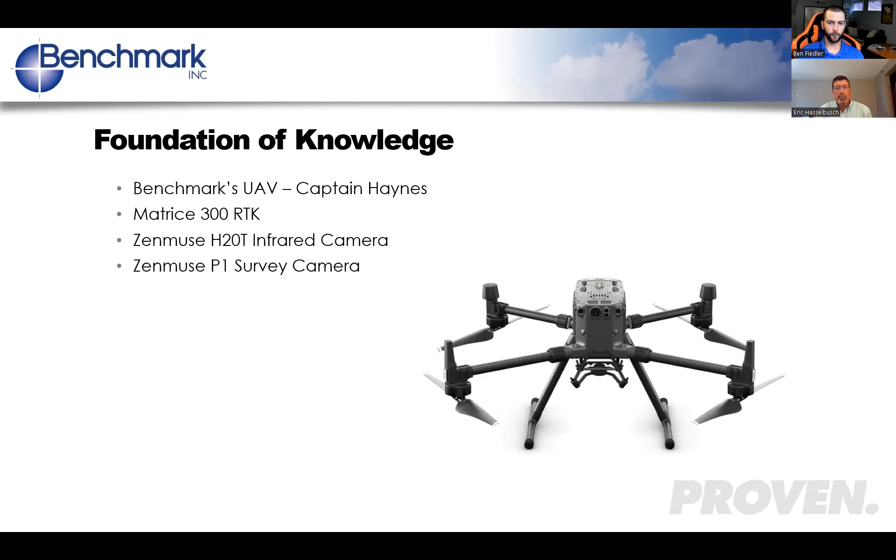So when we're doing a survey with the drone, we can really reach out there and take some really close-up photos while the drone stays far away. The other camera is the P1, which is a purpose-built survey camera. It is engineered to take the best photos for the purpose of creating digital models, maps, all of the things that we're using it for. It's purpose-built just for that application.

The next thing we're going to talk about are orthomosaics. An orthomosaic is a series of photos taken 90 degrees from the ground that are all stitched together to create one large image, similar to Google Earth. There is a technical difference between stitching and an orthomosaic, because during this process, it's actually recombining all the photos pixel by pixel so that there aren't sharp edges between the photos.

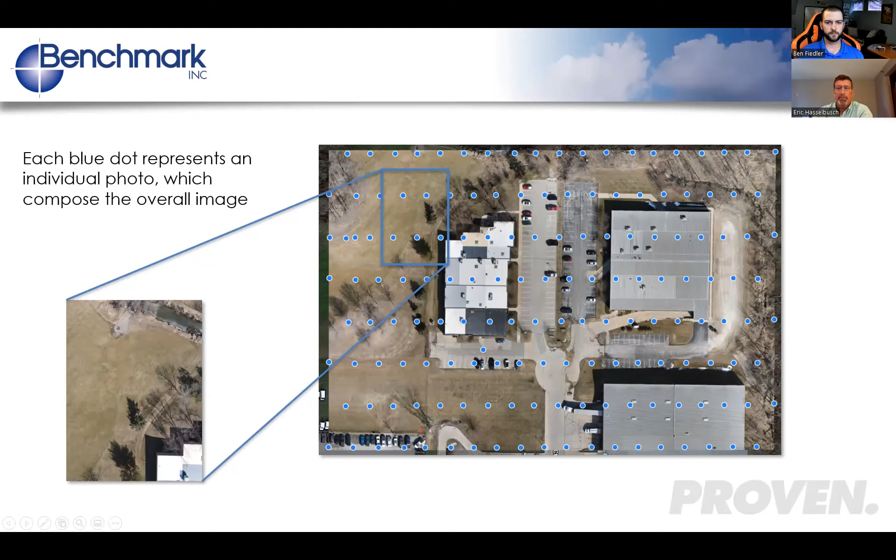So the next topic we're going to talk about are the types of orthomosaics that we are creating. The first one is an RGB, or red, green, blue, orthomosaic. These are orthomosaics comprised of visible light photos, your typical photos you'd see on any type of camera, images that are just in the visible light spectrum.

The other type of orthomosaic is the infrared or thermal orthomosaic, which is from an infrared camera using infrared light spectrums. That's what we use to identify wet insulation.

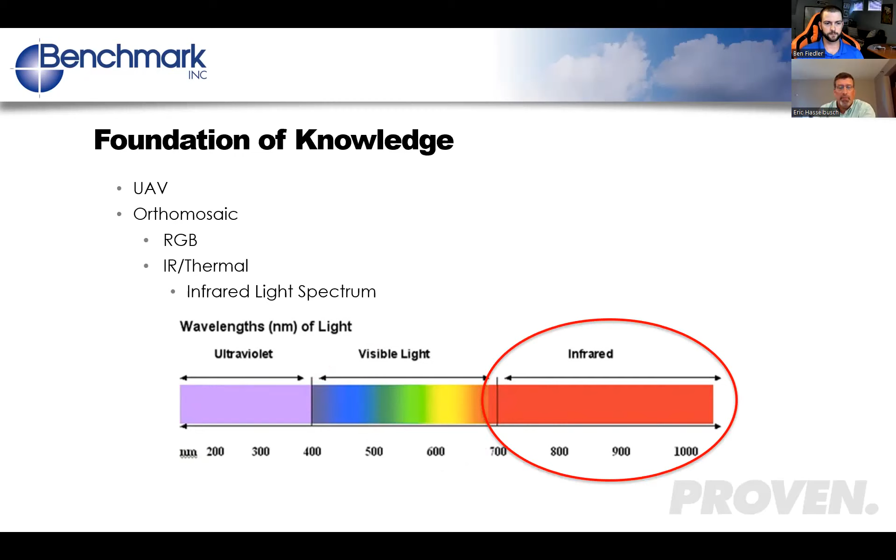Now we have some orthomosaic definitions out of the way. We're going to move into some of the legal side of the drone industry, the first one being the FAA, the Federal Aviation Administration. In the United States, this is the government body responsible for managing the laws and practices around any aviation. Every country is different - Canada is regulated by Transport Canada - and because of that, every country has different drone laws. For the purposes of this presentation, we are only focusing on the United States and the FAA.

For the FAA, all the laws are contained within 14 CFR Part 107, which is a long, kind of confusing term. Everybody just calls it Part 107. That's the law that regulates drones specifically. So anything within Part 107 are the laws corresponding to the drone.

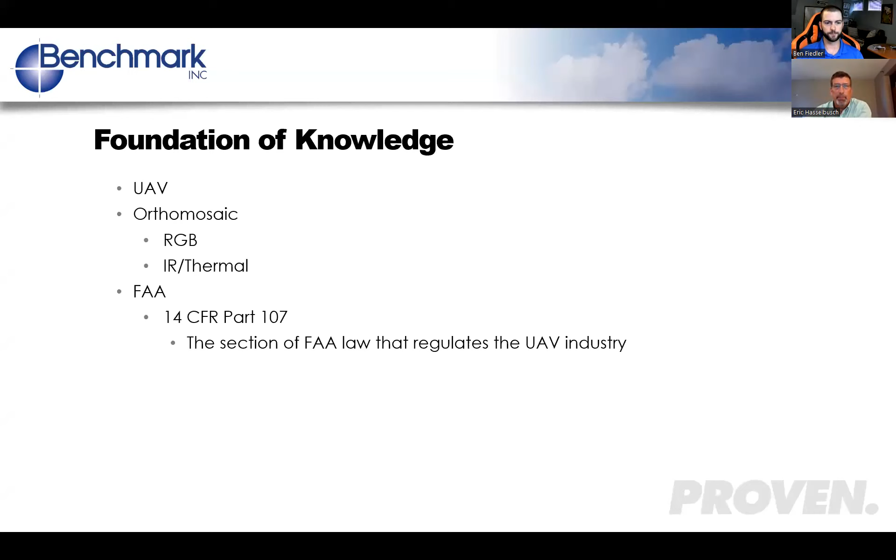Let's go ahead and take a look at our first poll question. We have many clients that have drones or UAVs, so we'd like to find out: does your company have licensed UAV pilots on staff? As that poll question pops up, it's pretty quick and simple to answer. Please answer yes, no, or planning on adding them in the future.

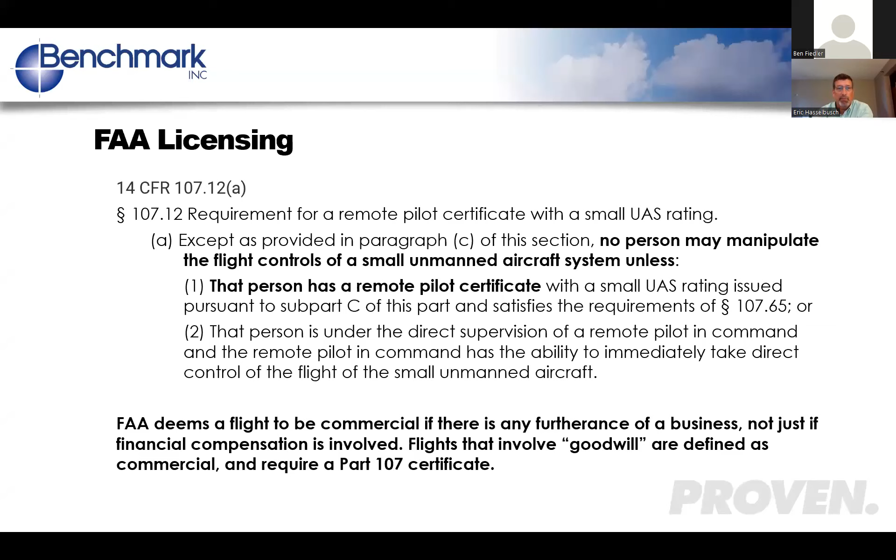Another key piece of that regulation is that it requires the pilot to have a physical copy of their certificate with them at all times. It looks a little bit like a driver's license, issued by the Department of Transportation. You are required to have a copy of that with you anytime you're operating the drone. So if somebody is going to be flying a drone at your site, a very easy way to identify if they're qualified is to ask: do they have a physical copy of their license or certificate with them at the time of the flight?

The next piece is insurance. First off, the FAA does not require insurance for UAV operators. Some states like Minnesota do have requirements to have insurance, but that's fairly rare. By and large there is very little requirement to have insurance.

It's a good idea to make sure your drone operators have liability insurance for damage caused by the UAV. So if there was an accident, if they were to crash into a power substation, anything like that, as well as photographic liability. Because it is a photography service, there's a special type of insurance that must be carried for the photographic side. Additionally, there's hull insurance for drones - if you crash the drone, your liability insurance covers the damage to the item it crashed into, while hull insurance covers the damage to the drone itself. Those are insured separately. So there are really three types of insurance a drone operator needs to have.

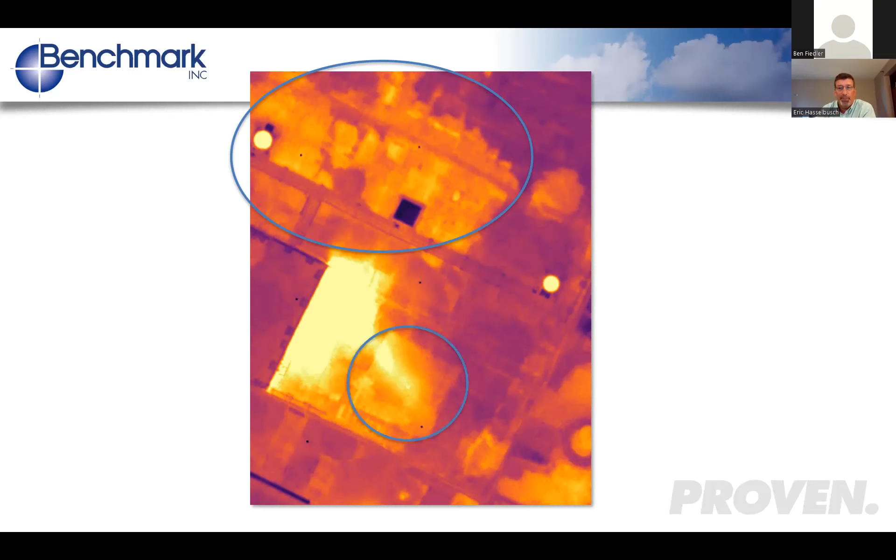If you look down below, there's another spot right here that also looks like a wet insulation signature. After we went on the roof and cut cores, we were able to identify this top area is wet insulation, and this bottom area is actually a roof repair that used a different type of insulation. Because there was a different type of insulation, the signature looks slightly different.

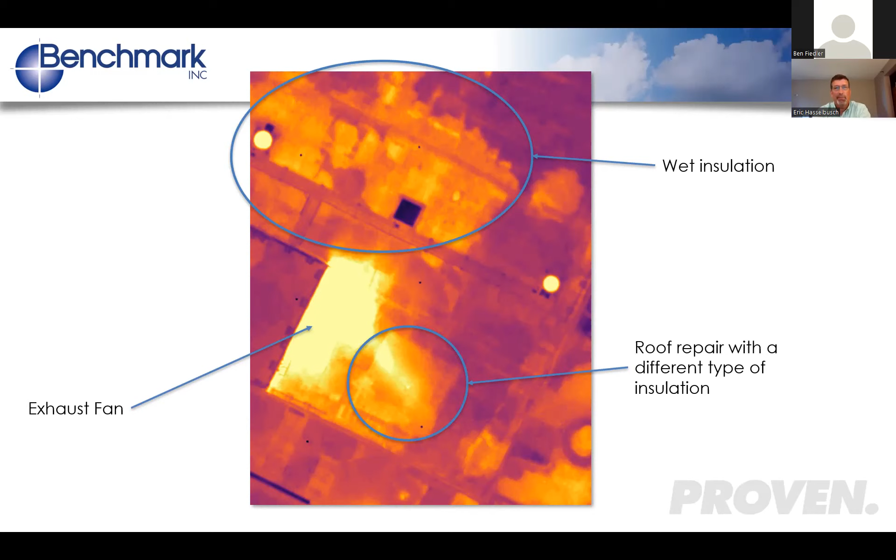And just for your reference, this big blob here is an exhaust fan on the side of that building, so it's exhausting hot air out on the roof.

So Ben, how many miles or how many flights have we flown? I think we're over 500 miles flown. I've lost track of the total number of flights, but it's several thousand individual flights going on.

I think Ben made a lot of technical points, a lot of FAA information, but it's really pretty simple. Does the pilot have remote pilot certificates? Do they have that? Are they insured? And most importantly, do they have the skills to help you reduce risk and increase the long-term performance of your assets? It's combining the technology of the UAV and the data collected with the experience of that pilot to help you manage those risks.

So let's take a look at how we can use UAVs in a roof management program. The first thing we'll talk about is the infrared and thermal moisture survey. Ben shared one image of that, but what we've learned with UAVs is we can cover large facilities, in many cases million plus square foot facilities, relatively quickly.

Number two, we can really quantify that wet insulation. When we have an accurate orthomosaic or imagery, we can quantify the amount of wet insulation on that roof. And risk is a huge issue today. The risk of having people walking across your roof at night in the dark is greatly reduced when we can fly with a UAV versus handheld. Both options exist, but it does reduce risk when we fly with the UAV.

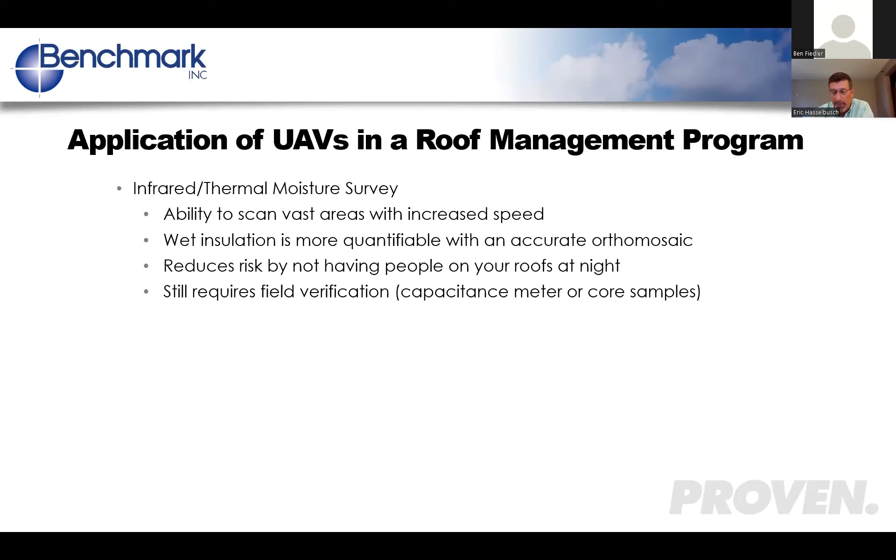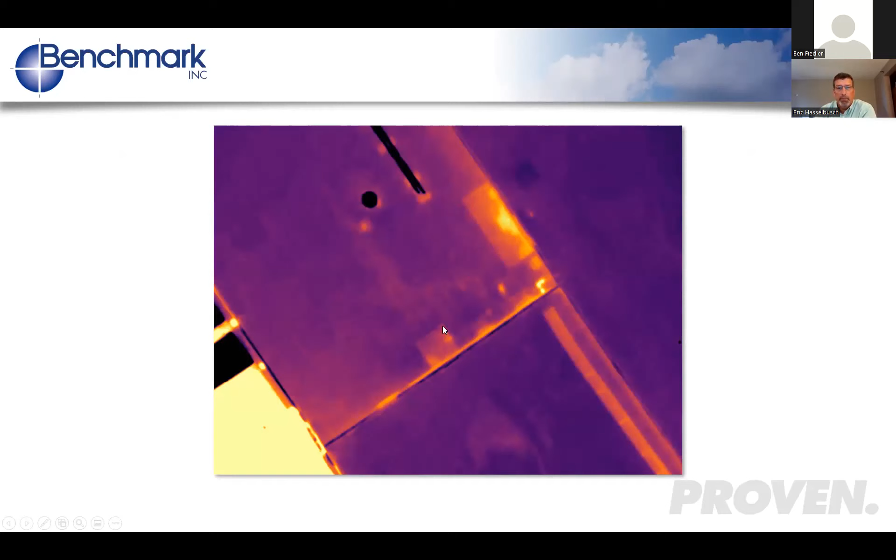So within the drone software, you can then go in and draw over those areas a shape that will tell you exactly the size of the wet insulation. So in this case, that larger area is 170.29 square feet of wet insulation.

And so we've eliminated the need for a consultant to be on the roof measuring, locating where this insulation is. But furthermore, if you do end up having a contractor come in to remove that wet insulation, we can also give them dimensions to zero in on where they need to start removing insulation. We can tell them that it's 14 feet 6 inches off the south wall, and it's a total of 10 feet wide, and they can very easily go to the roof and find that exact location.

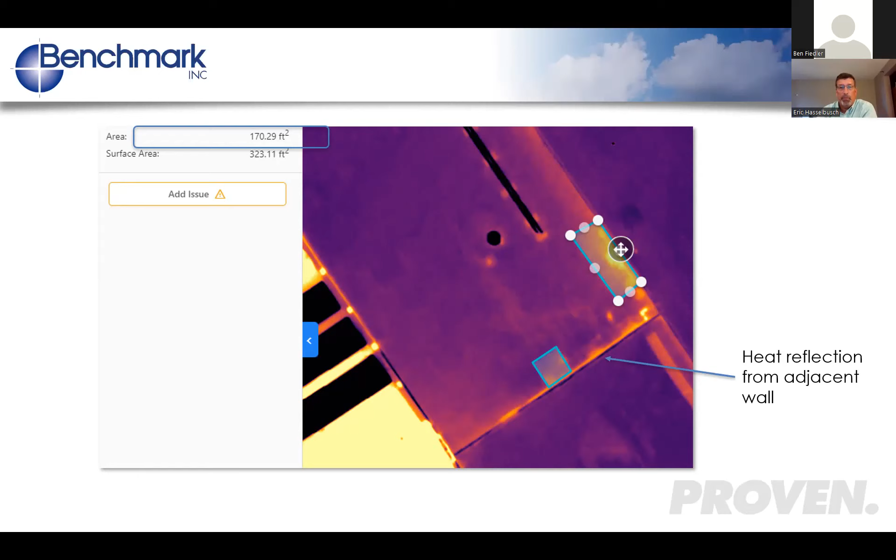Thanks, Ben. We took a look at some infrared images, and you'll see some more in some case studies, but let's take a look and talk about RGB orthomosaic images and how we can use those. It's really the ability to create highly accurate maps for dimensioning, and what you can see is really quite amazing, and then how to use that information as well.

So this first sample that I have, I'm showing you a comparison of 3 different images of the same roof drain. On the left here, we have the 45 megapixel image, taken with the P1 mapping camera on our drone. The image in the middle is a 12 megapixel image, taken with a smaller, cheaper drone. And the image on the right is from Google Earth. As you can see here, there's quite an extreme difference in quality.

One of the things I like to point out on this image is right here, you can actually see our office is right on a golf course. During the day, we end up with quite a few golf balls on the roof of our building, and in this case, one found its way to the drain. You can actually see the golf ball in the drain. On this image, you can see that there might be something there, but if you didn't have this image to compare to, you probably wouldn't have known that was a golf ball. And obviously with Google Earth, there's no chance you will ever see something as small as a golf ball.

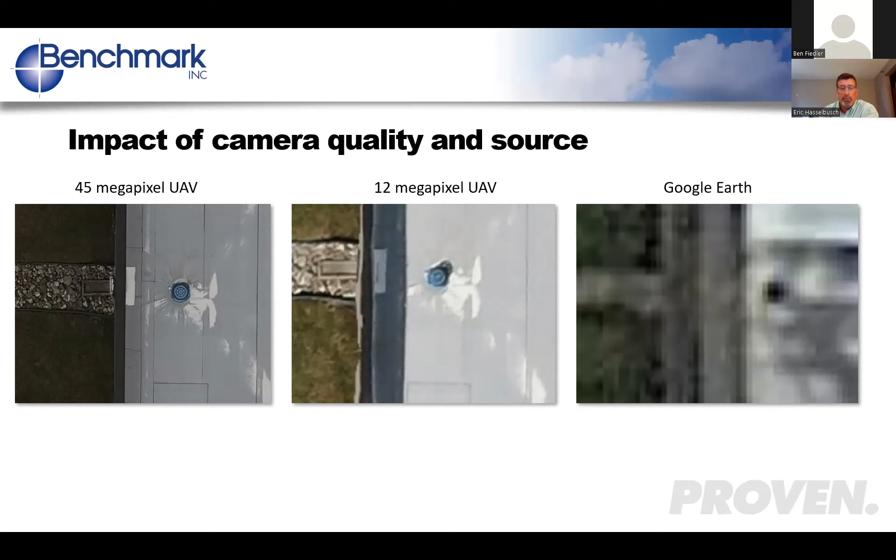But the 45 megapixel image, we could still zoom in further. So I went ahead and zoomed all the way into the drain. Now you can see that drain getting a little pixelated. It's getting hard to see, but you're still able to see quite a bit of detail, like the openings in the drain strainer. The 12 megapixel image, you might know it's a drain strainer, but you can't see any of the fine detail. Google Earth, you really can't see anything at all.

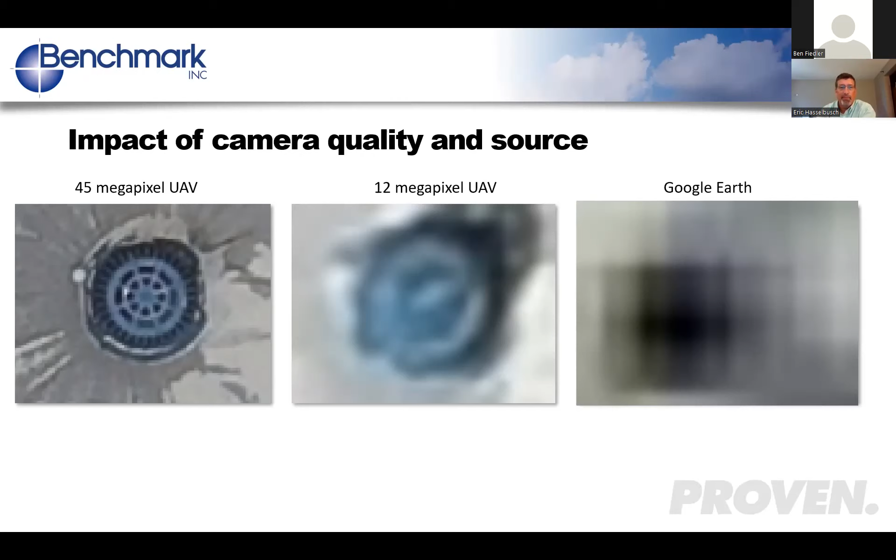We did just get a question asking how high were these images taken. The drone images were 175 feet above ground level. Google Earth is obviously satellite based. But this really goes to show the difference that the higher quality drones can make.

The next example I'm going to show you is how we can use these for measuring. As you look, there's this blue line that I have drawn across the roof, and you can see on the left that that's 107.39 feet long.

The next slide, I'll show you how I have quantified that in the past. But that is a measurement. We can get up there on the roof, we can pull a tape measure, you can verify that it's accurate. The software does tell you your known accuracy, so you have pretty good confidence of the results of the measurements.

But the thing that I find very interesting about this measurement is it also captures three-dimensional information. Right here in the corner of this roof, we have tapered insulation for drainage purposes, and you can actually see a little bit of the water runoff from this unit. You can see where the water runs, which really shows you the corner of where that tapered insulation exists. If we look over here at the slope profile of the roof, this point here would correspond to this side. You can see the slope running downhill, then you can start to see the slope going back uphill. So you're able to see something as small as 1/8 inch tapered insulation.

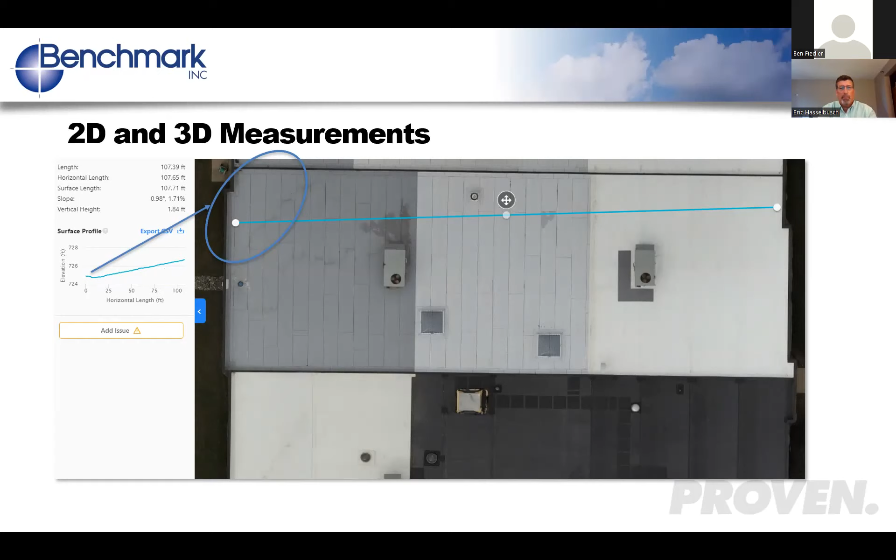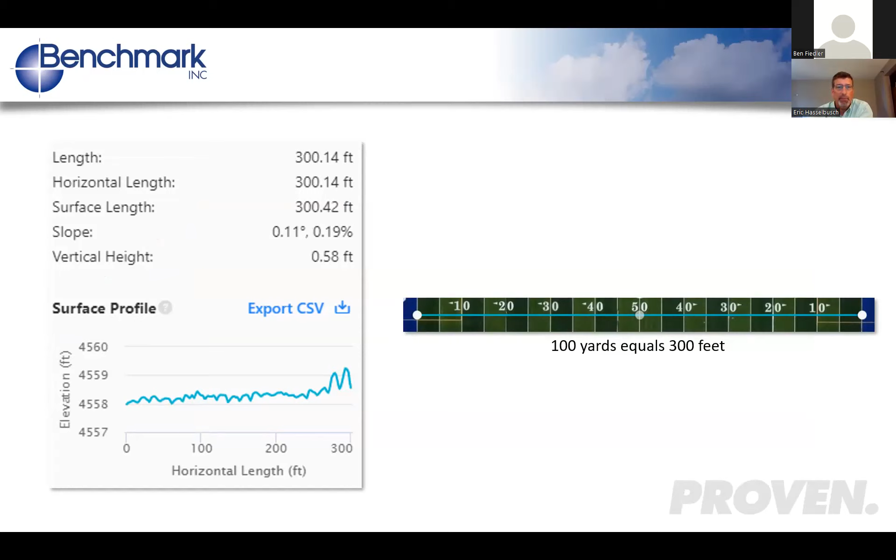Earlier, I mentioned a way to verify the measurements. During a recent project, I was flying at a high school that had a football field, so I went ahead and flew it and drew my line because I knew that was a known dimension. My measurement came in at 300.14 feet, so that's a very easy way to verify your measurements in addition to other verification methods.

So we talked about infrared, we talked about RGB, and now just imagine for a second you're sitting in your office and you've got a project you're working on, with engineers across the country, as many clients we work with do. You now have the ability, through using imagery and platforms, to talk through projects, whether it's a pre-construction meeting, a pre-planning meeting, or meetings thinking about remodeling a facility and making changes to the roofs from inside processes. You get a lot of really good information that you can use. And now Ben's going to share some 3D modeling, what we can do with it, and how you can apply that as well.

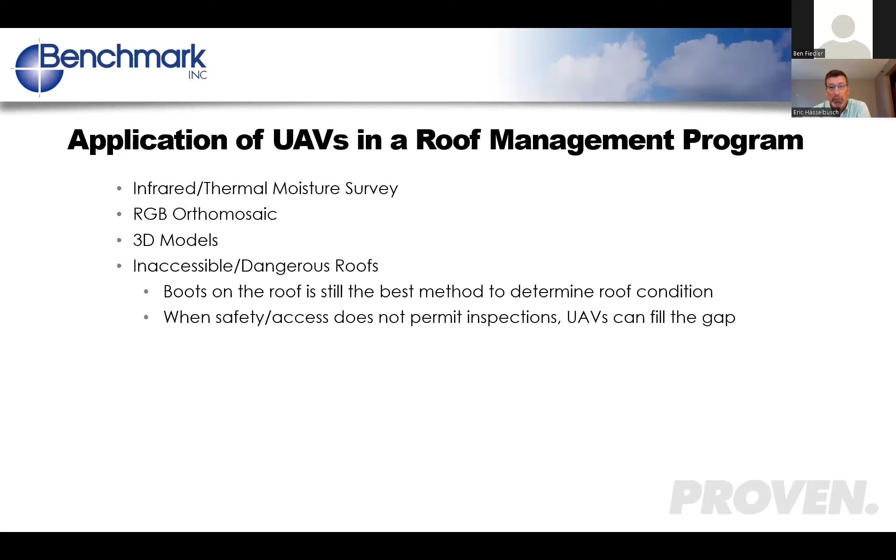We'll take a look at a couple examples here. These images were taken on a survey for a facility with all metal roofs on it. This is an image that was taken from the drone. Having that long telephoto lens on the drone allows us to keep the drone back a good safe distance, but still be able to zoom in to the point where you can very easily see the corrosion on those fastener heads, and the sealant on the joints of the metal. So you're able to see quite a few things from that drone.

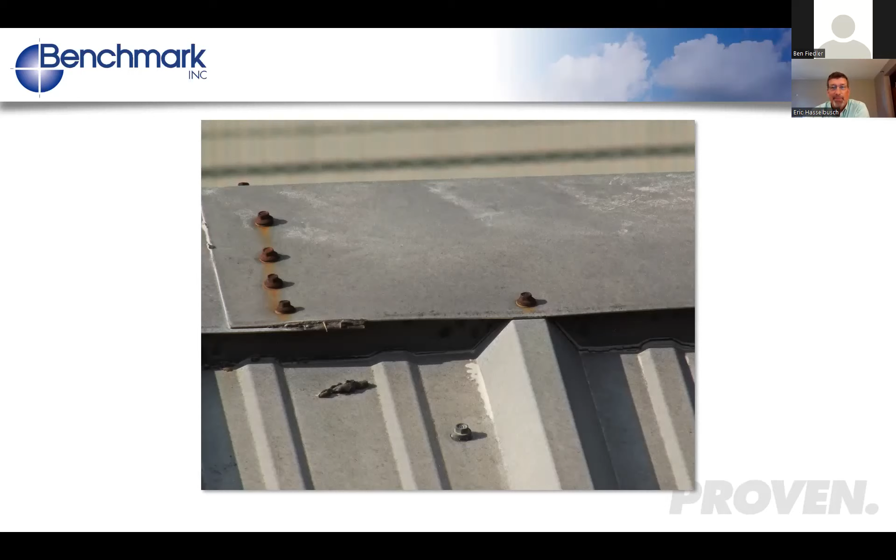However, there's also things you can't see. There should be a foam closure on the cap, but you can't feel behind the metal to see if that foam closure is there. On the metal endlaps, you can oftentimes get corrosion on the underside of the panel, and one of the things a consultant on the roof would do is walk that endlap and listen to see if it sounds crunchy, or possibly even disassemble that endlap altogether. The drone can't do that. My goal, my hope, is by the time I retire that there's a technology that can do that, but that's the long-term view. That's not where we are right now. In the meantime, we can reduce risk by getting at least some level of information remotely.

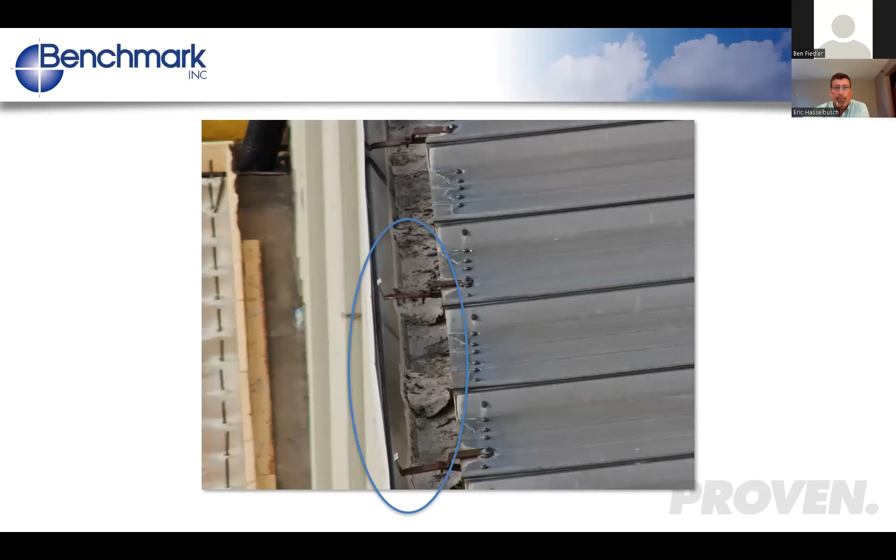This is another example, the gutter on the site. You can see there the gutter brackets were actually pulling loose. This is one of those photos that it's hard to take anytime. So even if you are doing a boots-on-the-roof survey getting information around that perimeter edge, if you have a site requirement that makes it impossible for us to access the edges, a drone can fill in the gaps.

This is another gutter issue where you're able to see that the gutter joints are breaking free. That might even be difficult to see from the roof, depending on your line of sight to it. You may not see that if you're standing directly on it, but by having the drone overhead, you can get a better view on it.

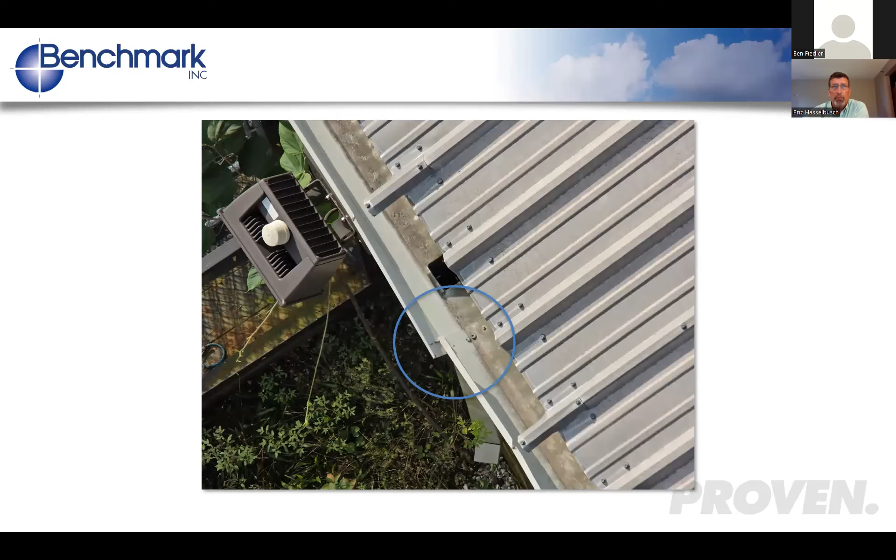So one thing I wanted to point out is that during a drone-only survey, our traditional model, the way we go about these surveys is we actually send out 2 consultants. The first one being the drone pilot, whose only job is to keep the drone flying safely and get it where the other consultant can use it. The other consultant's job is then to sit there and watch the video feed on a large monitor so that they can focus just on looking for defects. That way the 2 can work as a team, with a division of labor so that everybody is really just dedicated to the one thing they need to do best at that time. This is an image that was taken during a survey where the other consultant took a photo of me flying the drone around, but it gives you an idea of what that process can look like.

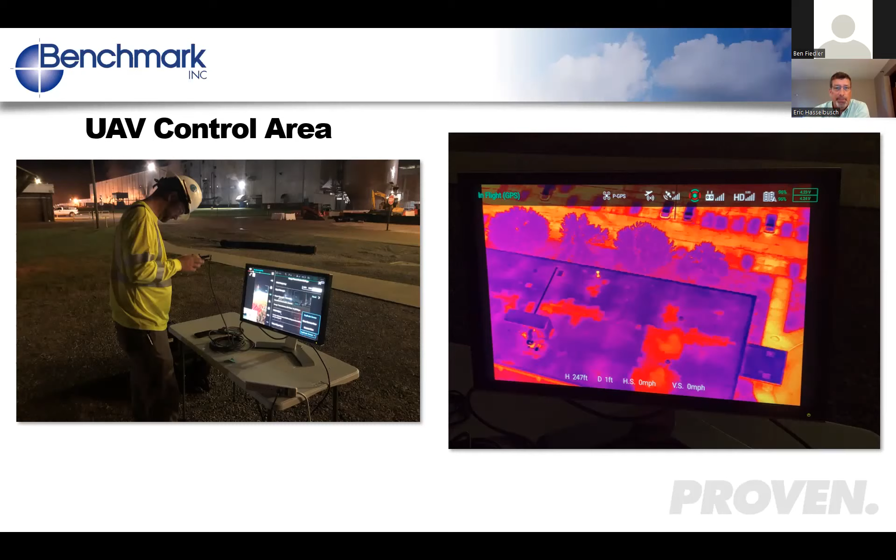I think that's a really important process because we talk about having boots on the roof, and the example Ben just shared was in a situation where we can't get on the roof, either inaccessible or not safe to get on. It's having someone that can focus their attention on analyzing what they're seeing, so when we leave the site, we've captured the information or data that we need at that time.

So we've spent some time talking about UAVs and how it can apply in roofing. Let's talk a little bit about paving now, and we're going to touch on land surveying. As you've seen with the point cloud 3D model Ben showed and some of the other images, we're capturing millions of data points. Let's see what that looks like and how it can be applied to pavement.

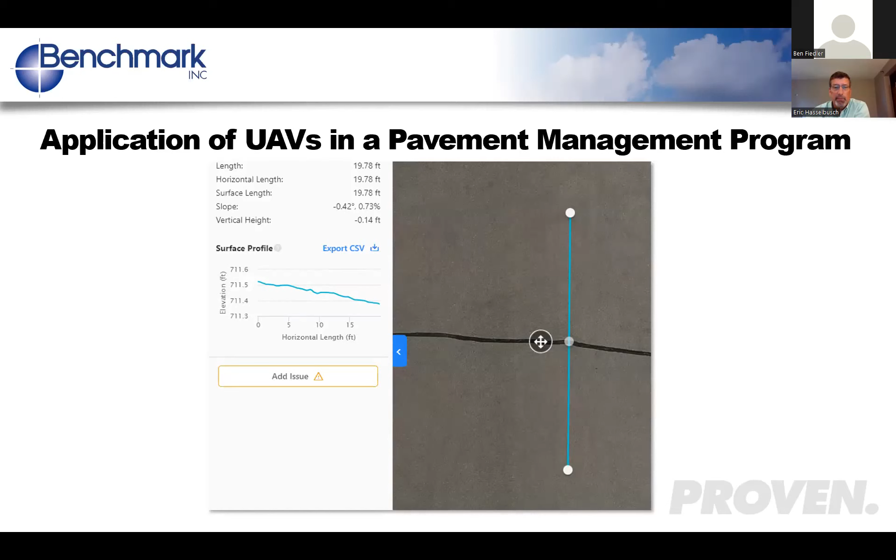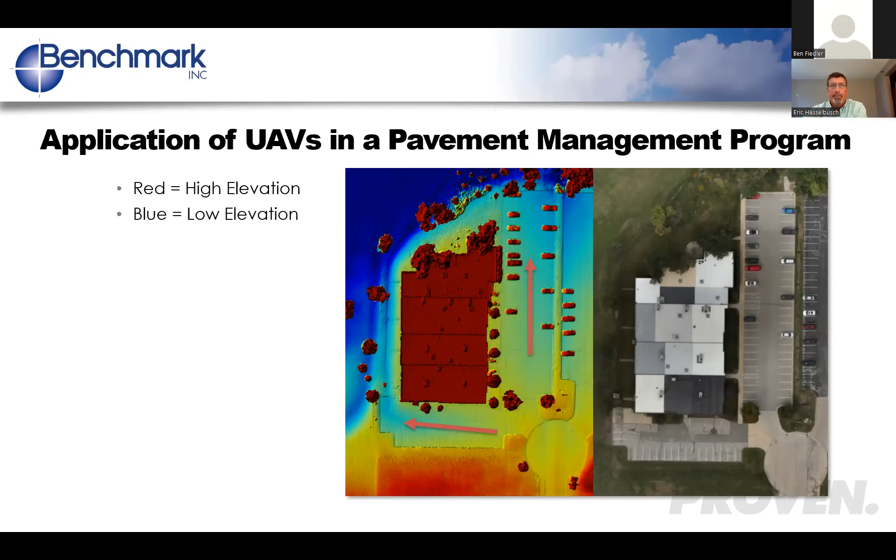So one thing I do want to touch on is getting into the weeds a little bit on how this data is generated. How does the computer model know what these elevations look like? And that's from a point cloud.

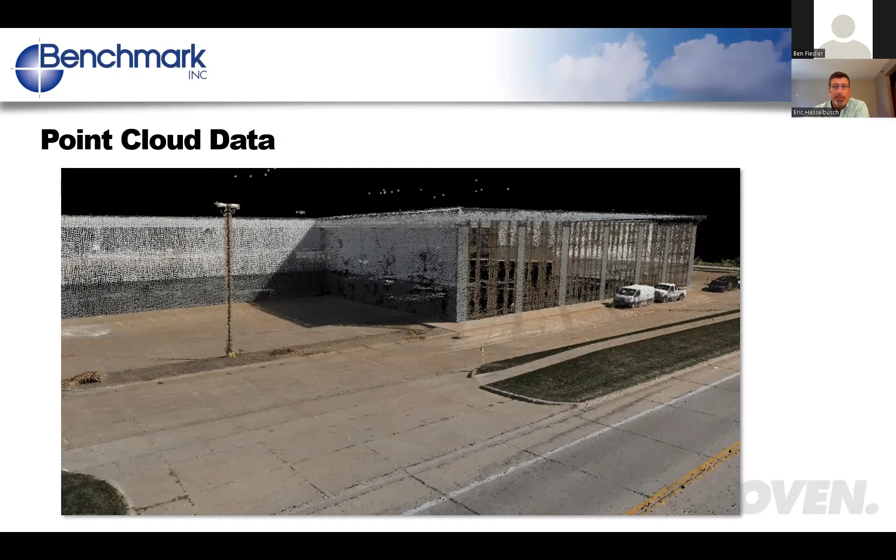So if you blow that image up, you can actually start to see each of those points that are put together to make that model. The computer system can look at that and see how each of the points compares to each other to determine that slope.

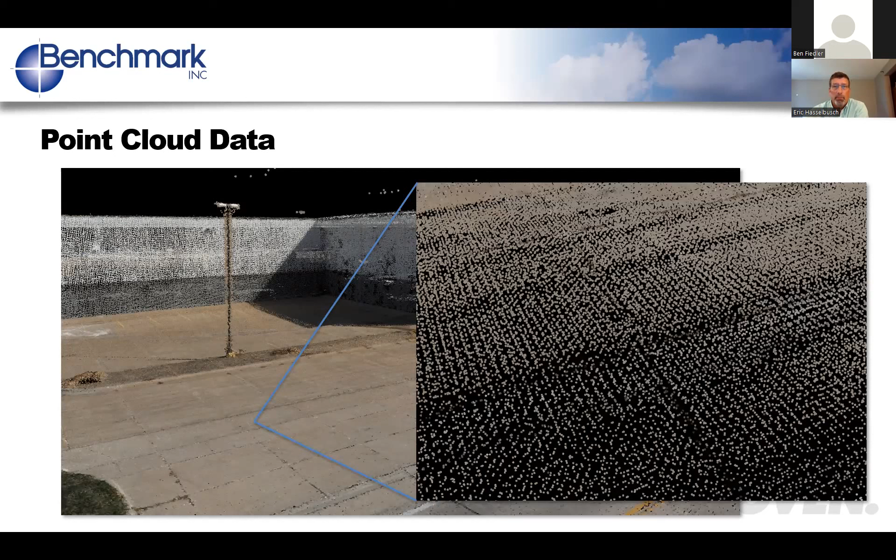So as we talked about land surveying, and Ben just shared the vast number of data points used to build models, we can also use the UAV for lighting surveys. And we're not doing quantitative, but in this case we've done some qualitative analysis, which we'll show when we get to a case study.

So the next section up will be case studies, but before we get there, I had a little bit of a soapbox I wanted to get on and talk about the difference between data and information. I recently read a book called The Goal by Eli Goldratt, and if you're in a process manufacturing type environment, you're more than likely familiar with that book. In the book, Eli writes that he previously thought of information as a section of the data used to make a decision, and later he realizes information is the answer to the question asked.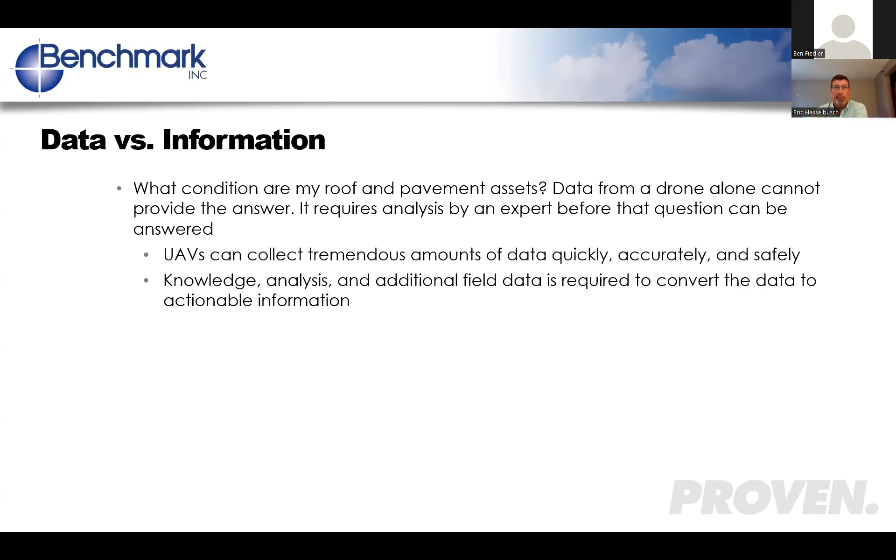So if the question is, what condition are my roof and pavement assets, the data that the drone provides isn't going to answer that question. You're going to have analysis by somebody, preferably an expert, that can answer that question using that data. The drones capture a tremendous amount of data quickly, safely. It's amazing, every day it blows me away what we can do with the drone. However, until you apply knowledge, analysis, and additional field data from that expert, they cannot convert that information, that data, into actionable information. And so with that, we'll get started into our case studies.

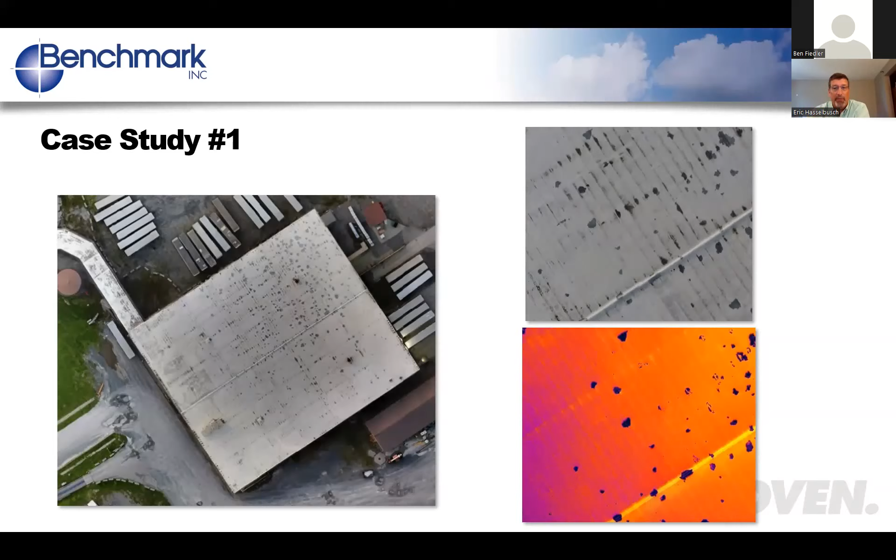Let's take a look at our first case study. It's really important you pay attention here because I want you to look at the top right and then the lower right. The top right, we have an RGB image of this roof, fairly detailed. Below that, we have an infrared image. And the question we're going to ask you to answer is, what type of roof system is this? Based on what you saw in that image from the drone, what type of roof system is that?

So let's go ahead and share this question. Our options are a coated metal roof, white single ply, spray polyurethane, and a coated modified bitumen. So give that some thought as you saw those photos. What type of roof system do you think this is?

Okay Ben, let's go ahead, we're still getting quite a few responses. I'm gonna give it another couple seconds. Perfect, they're still flying in. A lot of analysis taking place on this. That's good.

All right, we'll go ahead and end that, and I will share the results. So we have a coated metal roof at 40%, white single ply 27%, spray polyurethane 7%, and coated modified bitumen 27%.

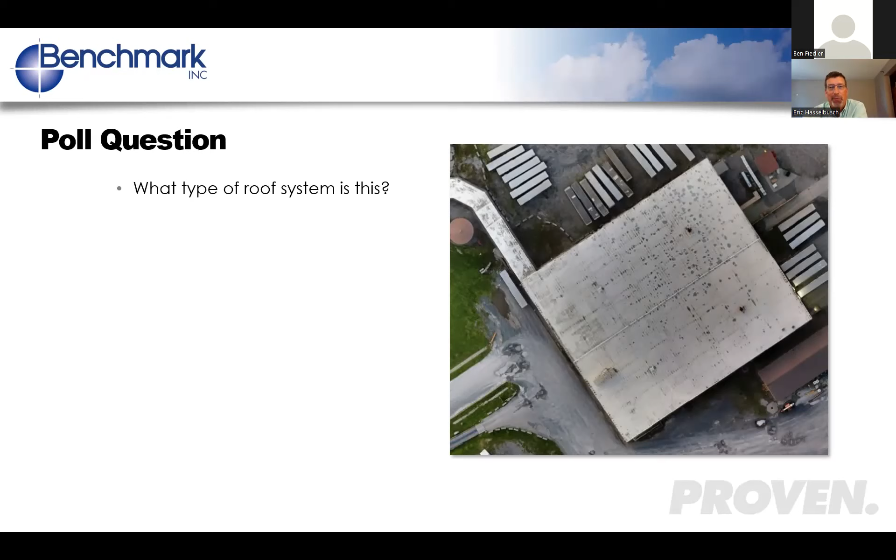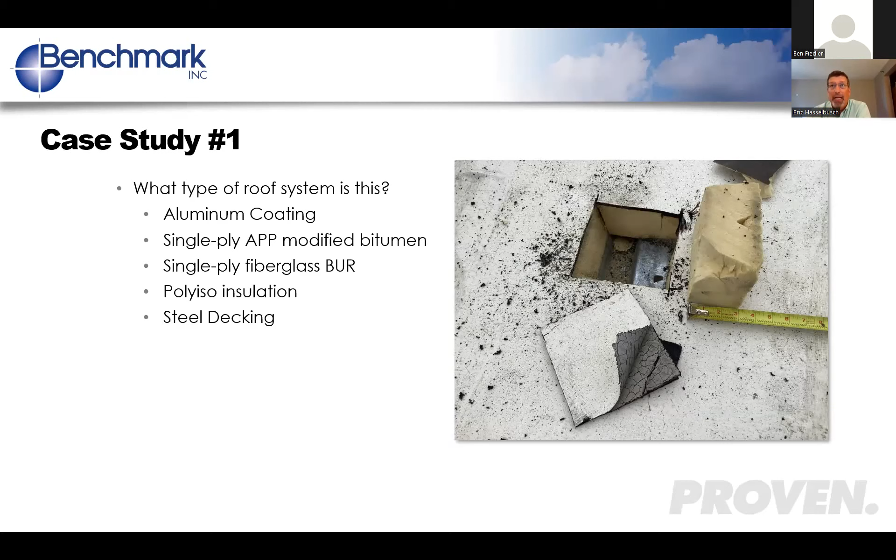Let's take a look at what the answer is, and we'll talk about this a little bit. The correct answer is it is a single ply modified bitumen roof system with an aluminum coating. So what's taking place here? 40% of people thought it was a metal roof. And I can tell you, when we had this discussion internally, when you look at these images, at first glance, you're like, yeah, it looks like it could be a metal roof. Until we dug deeper and got on that roof, took a core sample, and understood what it was.

So why was that? Well, the membrane ran parallel to the slope, and there was a control joint installed at the ridge. So that's why it was easy to appear that it might be a metal roof. And that is why it is so critical that we have boots on the ground, because in this case, more than 40%, probably close to 70%, of our audience would have identified this roof incorrectly. So it's easy to happen, and this is just one example of why it's so important you pair the data collected from a drone with the expertise and analysis of an expert and have boots on the ground.

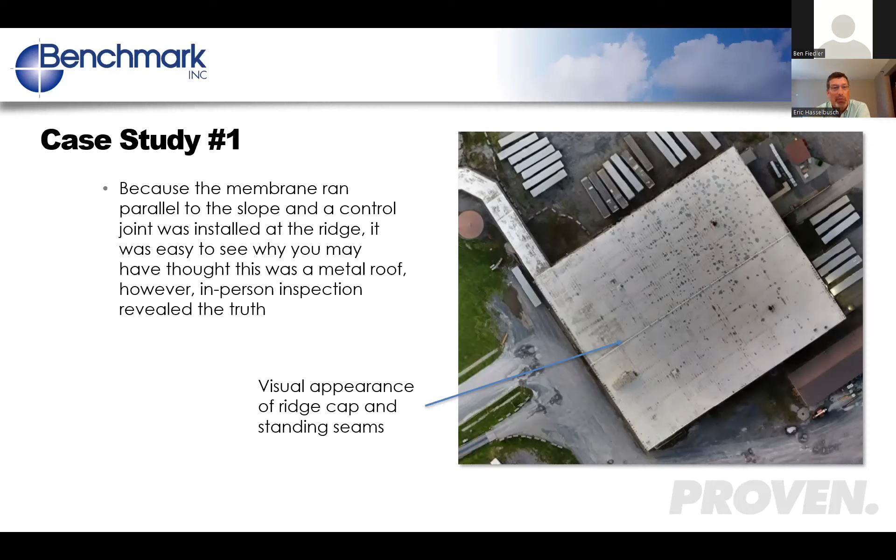So that's case number one. Let's go ahead and look at some more case studies, Ben.

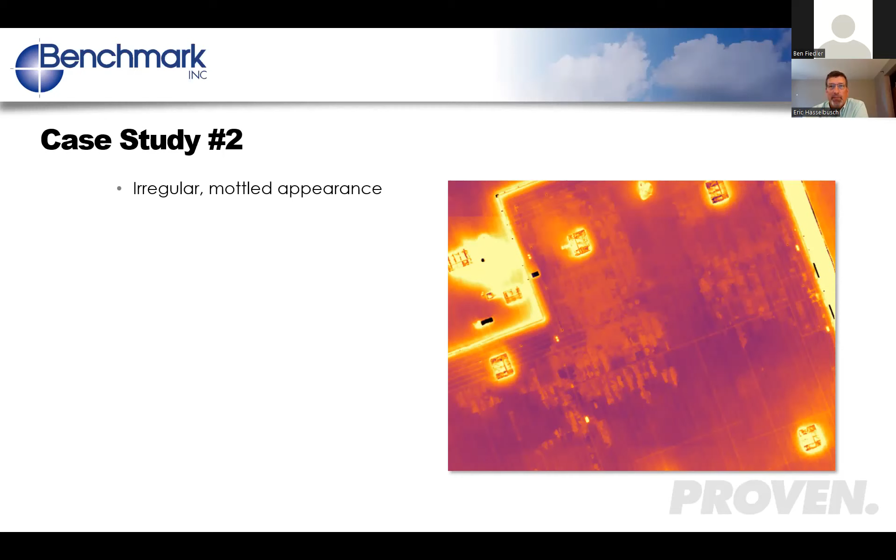So this was another infrared that I did, that I got done with it, had it processed. I'm looking at it, and I just didn't know what I was looking at. It tried to look like wet insulation, but the signature was just different. It didn't have a nice board pattern to it. I knew something wasn't adding up. So the question I had was, is this interply wet insulation, both, or neither?

So with that, I will launch this poll question. Our options are, what is this infrared signature showing? Interply moisture, wet insulation, both, or neither?

Getting quite a few results in, give it a few more seconds. And while you're answering this, if you have other questions that come to mind, feel free to shoot those in.

All right, looks like most results are in, and I will share the results. 24% identified as interply moisture, 5% wet insulation, 27% both, and 43% neither.

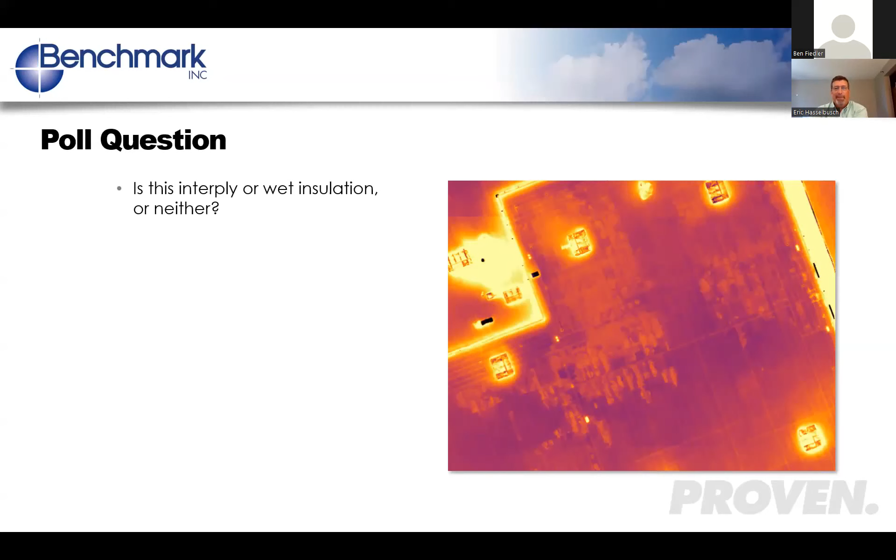So Ben, why don't you share what you learned on this roof? So after I did the flight, the next day I got up there and I ended up cutting some cores. And it turns out this roof system was somewhat unique in that the existing roof was TPO, that a few years earlier they had then covered again with another layer of TPO, with membrane directly to membrane. So normally you would see a layer of insulation there, but in this case, you effectively had a 2-ply TPO roof system.

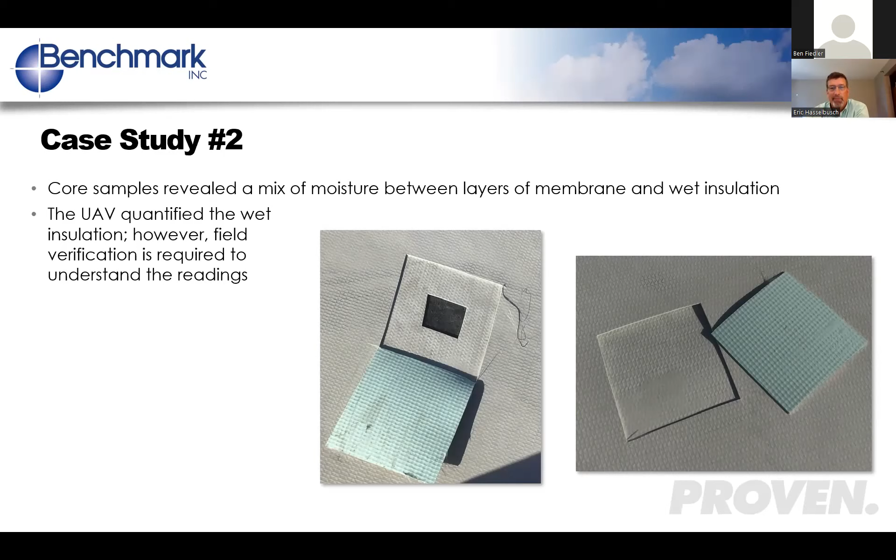And so as the top layer would leak, water would get between the membrane plies and spread out across the roof. It would then find another leak in the old roof system and leak down, and the insulation below would also become saturated.

In this case, it truly was both. It was interply moisture, and that's really prevalent. You can actually see the moisture sitting between the mechanical fastened seams. And over in these areas, you can see where it starts to become more muddy. That's because you see both interply and wet insulation. Both signatures are showing through.

So it's one of those where the core samples really were able to answer the question, what condition is my roof? And Ben, what else did we learn? Had we not done core samples, what else could have potentially happened as a result of this, or what else did we learn from the core samples?

Well, the big thing that comes with wet insulation, typically like in this situation, a large portion of the roof was wet. So the next discussion is, do you replace the wet insulation or do you replace the entire roof? However, once we cut the cores and found there were already 2 layers of TPO membrane, by code, it meant we had to replace the roof. So we could either replace wet insulation or replace the roof. The infrared, or the core sample, eliminated the option of doing a recover in this situation.

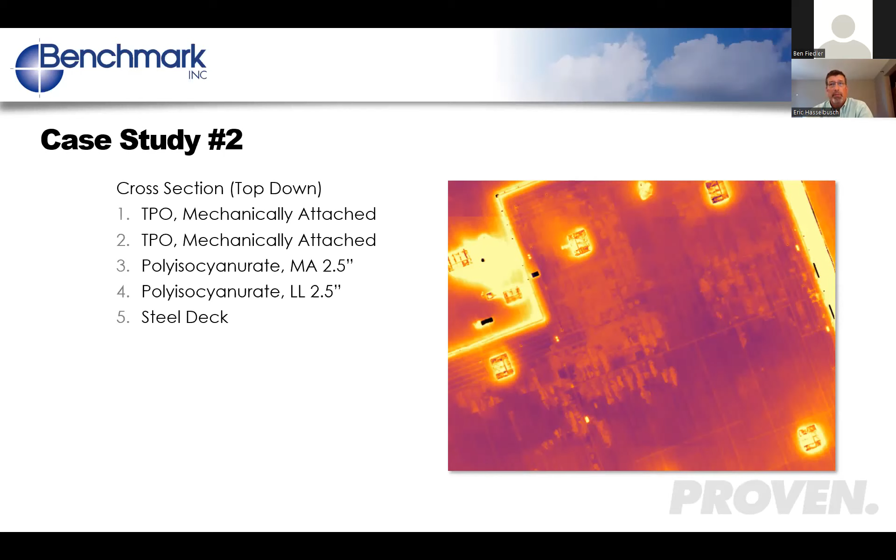In this case, they realized where they were adding parking stalls was actually already well lit, so they were able to not add additional lights to maintain safety. This is a great way to get a really good high level view of lighting. Obviously, in a lighting situation, you do need actual measurements, but the hard part with those is they're very spot specific, as you're walking around holding a handheld meter, taking individual readings. The drone helps you start to see where you need to look for problem areas.

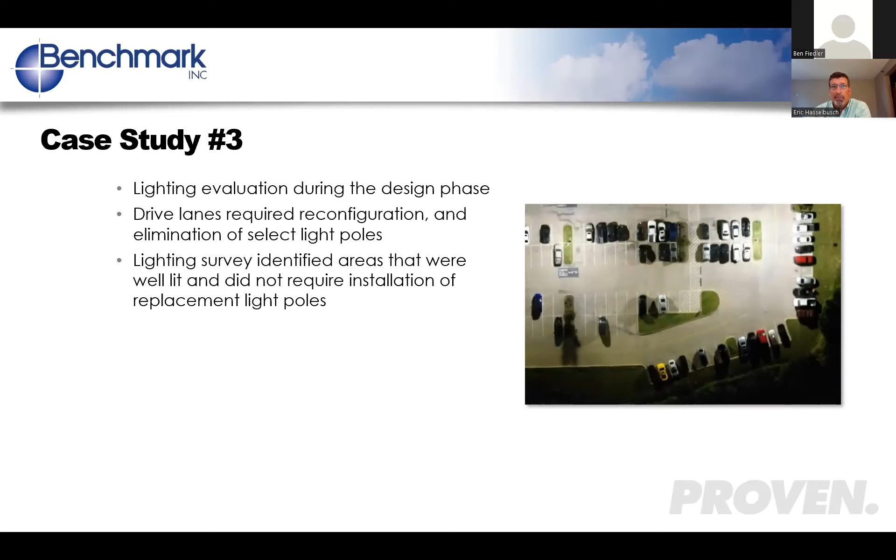The fourth case study we have is another infrared. Those I find have some of the most interesting aspects to them. The first time I flew it, the daytime high temperature was 89. At the time of the scan, it was 75 degrees, meaning we had a temperature differential of 14 degrees, which is really quite good. The wind speed that day was about 6 miles an hour.

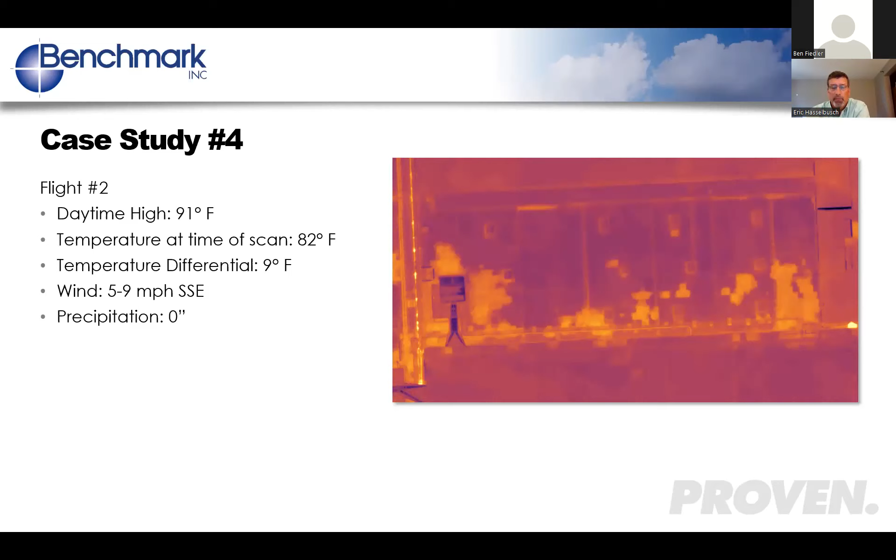So with Benchmark being really dedicated to being technically excellent, I went back and flew it the next night, and this is the result of that second flight. On this flight, the high temperature was 91, the time of scan temperature was 82, so we have a much smaller temperature differential. The wind speed was slightly higher, and there was no precipitation that day.

However, when you compare the images, you can really tell that second flight gave a much easier to read image. They're both accurate, you can see the same wet insulation on both, but that second one is just easier to do analysis on. And so Ben, go ahead, finish, Ben.

So the moral of the story is you can do infrareds with some rain, you can do infrareds with higher wind, you can do infrareds with small temperature differentials. You can't just look at any one of those conditions individually. You really have to look at the whole condition of the flight as a whole, as well as look at the images after the fact.

I think this is also an example, whether it's RGB or infrared images, or even doing consulting work, where things just don't always add up. It's an opportunity to really dig into things and understand why we're seeing what we see, because it's not always black and white as to what's happening on a roof or pavement. It takes time and thought to dig into those things. As we continue building on using UAVs and tying that into consulting, there's a lot more we're going to learn. So it's really important that whoever you're working with has a mindset of wanting to improve the process, because you can't just take the data from a drone and assume it's accurate.

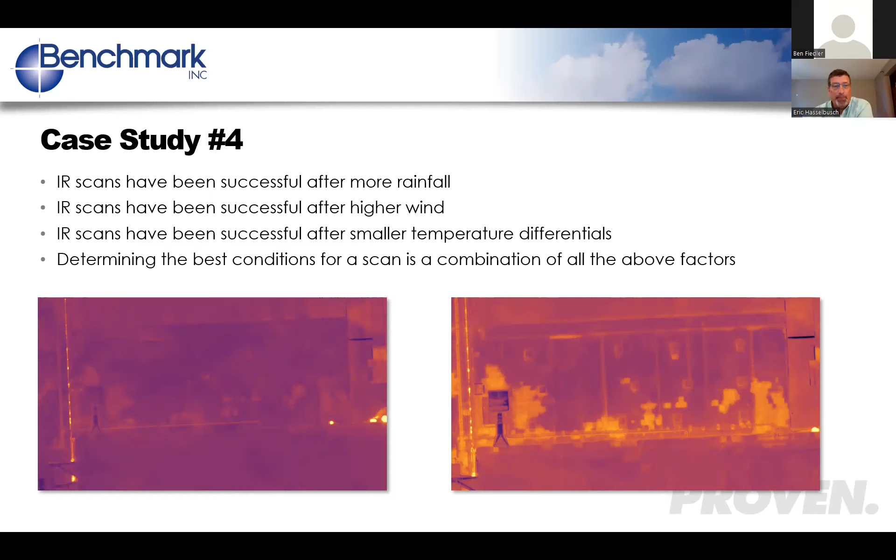So go ahead, continue, Ben. One more case study? Yeah.

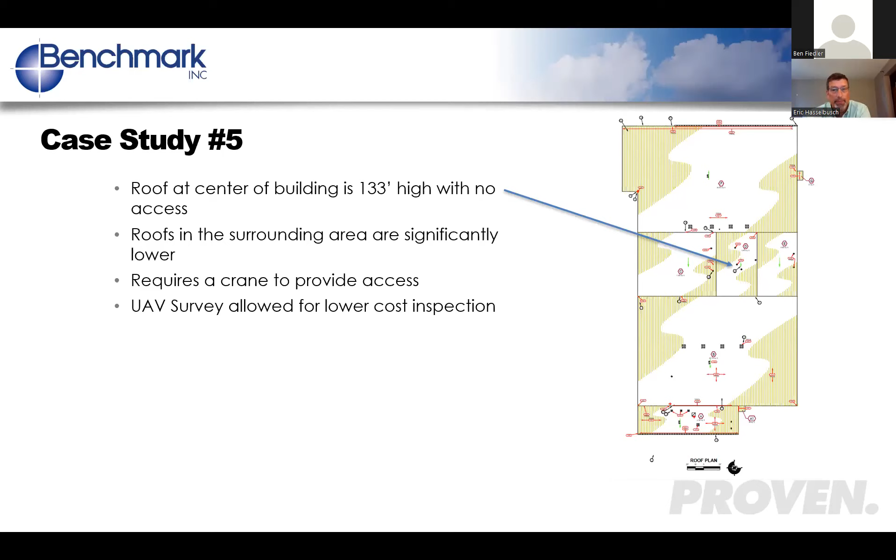All right, we're going to get some question and answer time. We had about 5 questions asked previously that we're going to get into, and there are a few more that came in during the webinar, but feel free to continue asking questions. We'd love to answer them. There are some we may not have time for, so we'll circle back and answer those individually.

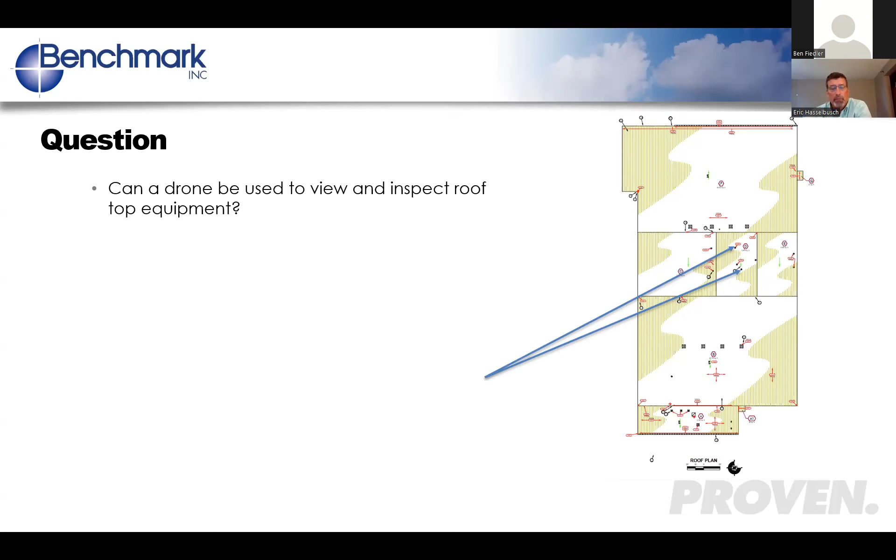The first question was, can a drone be used to view and inspect rooftop equipment? This is actually the same roof plan Eric was talking about earlier, a drone-only survey for a very difficult access location. It turns out on that high roof section there were 2 exhaust fans the site contact asked us to photograph. While flying, I was able to take photos, and the units had actually fallen over in a windstorm. We got some great photos and passed those along so the client could determine how to repair those units.

The second question: what are possible business cases to offer savings with roof replacements? Savings may not be the right word, but it's about having accurate data and information. When thinking about replacements, knowing if there's wet insulation and being able to accurately define and quantify the amount of wet insulation gives you an understanding of slope before you get there, and helps identify potential drainage issues. The wet IR is probably the biggest one, wet insulation, where you can determine whether to replace or recover that roof, and what your options are. Works well.

Let's look at the next question: what are the permission requirements when flying over commercial properties? Federally, the only requirements for where you can and cannot fly are airspace requirements, so adjacent to airports you have issues, and there are some no-fly zones - Washington D.C. is a no drone zone, and national parks are no drone zones. So on the federal level, there's not much specific requirement for flying over somebody's property, meaning in a lot of the country you can fly a drone over somebody else's property without permission. I want to point out Benchmark would never do that - that's one side of the drone industry that's a little uncomfortable, because legally you can, but morally it's not right. Some states like Texas require explicit permission to fly, but not everywhere - in Iowa, you can fly over anybody else's property and be fully legal doing so.